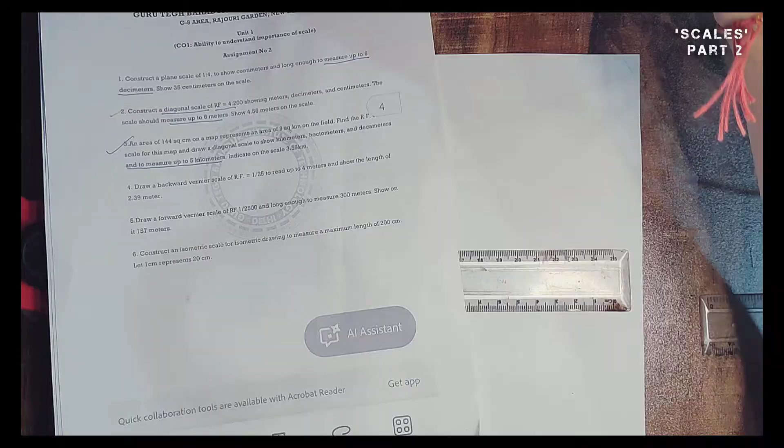Now in this video I'm going to explain question numbers 4, 5 and 6, which are remaining. So question number 4 says you have to draw a vernier scale. Okay, RF 1/25, read up to 4 meters, show the length of 2.39.

So basically there are two types of vernier scales. One is backward vernier scale and one is forward vernier scale. In this scale everything is similar to the previous scales. Only the difference will be shown. I will tell you the difference in this scale later on.

First, RF is given to you, 1/25. Maximum length is given to you as 4 meter in question number 4, and similarly LOS will be equal to 1/25 into 4 meter, converted to centimeter. You have to cancel 25 and 4, which means 16 cm, 16 centimeter.

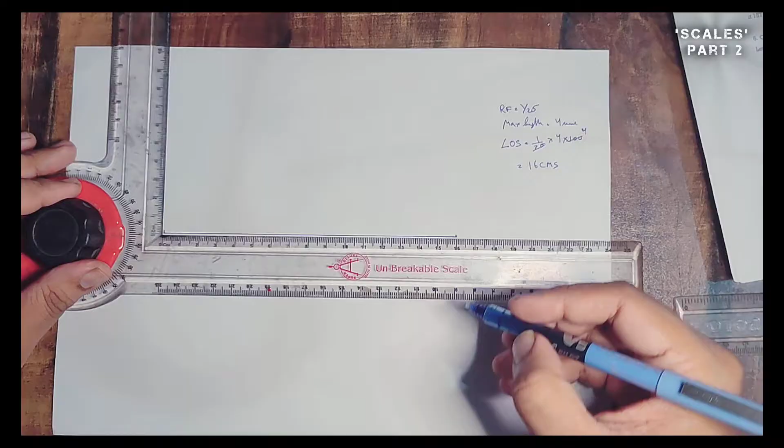So first of all you have to draw a line of 16 centimeter directly as for a normal plane scale. This line is of 16 centimeter. Okay, now you can divide this line into 4 equal parts by using the same method.

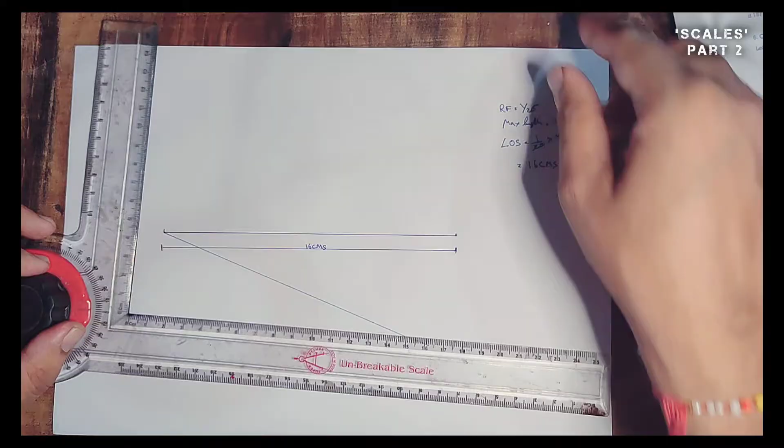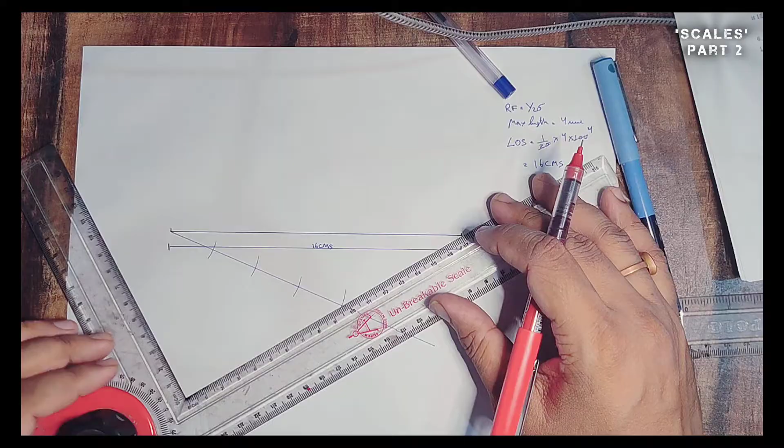Take any length of the arc and make 4 arcs on this line like this: 1, 2, 3 and 4. This would be your 4th arc. Now, as earlier, you have to join the last 2 points of this arc. 1, 2, 3, 4. This is 4 meter; 16 centimeter is representing 4 meter. So we have joined this.

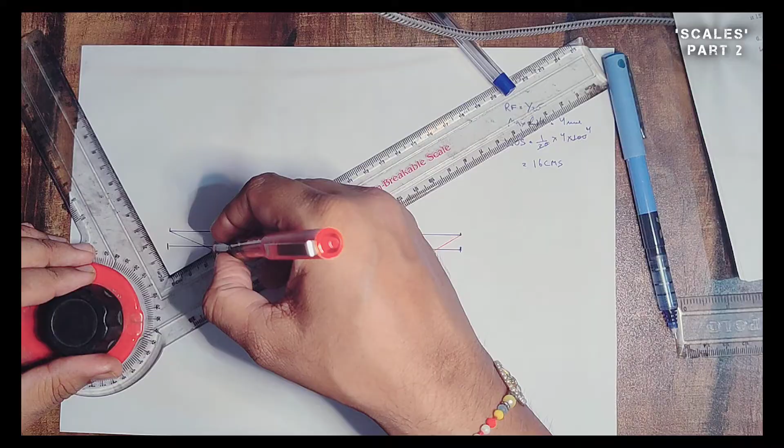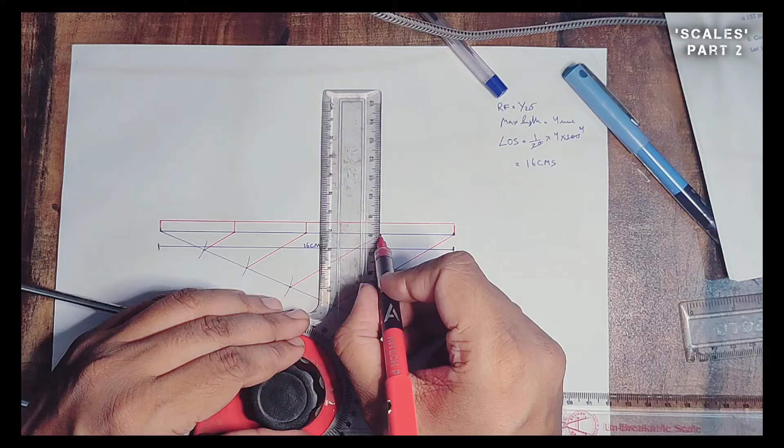Now you have to tighten your drafter, and then make the next line, then the next line, and then the next line, and then close this box as earlier, a 5 mm box. So this is the first division, second division, third division, and so on.

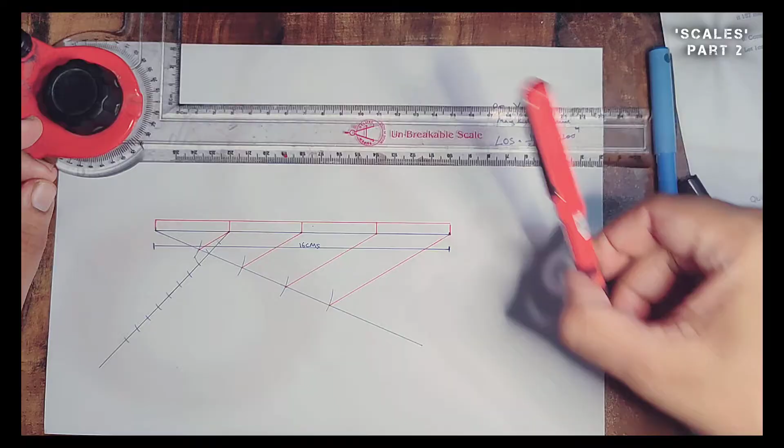Now for this first part you have to divide this into 10 parts as earlier in the plane scale. Same situation is there. Make a line, divide this line into small 10 parts. 1, 2, 3, 4, 5, 6, 7, 8, 9 and 10. These were the 10 parts as of your normal plane scale. Until this step you have to follow the same process of the plane scale.

You need to make your drafter parallel to this line, and then you have to make parallel lines through this point, like this. Like this. This. Again a parallel line.

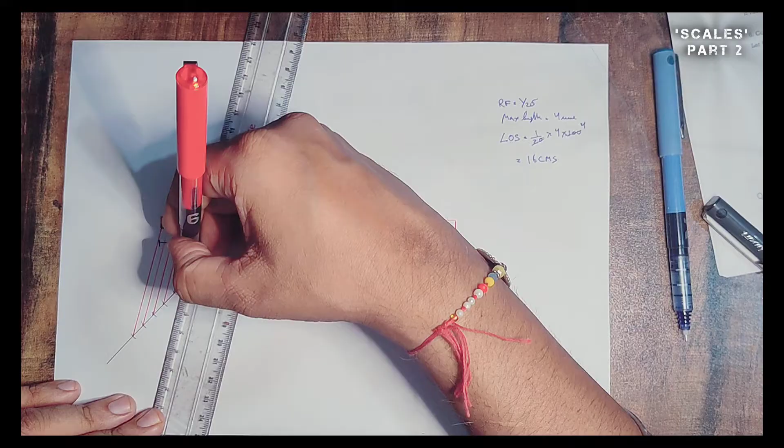This completes your division of the first box as of a normal plain scale. First, second, third, fourth, fifth, sixth, 7, 8, 9 and 10. So this is your division of the first part.

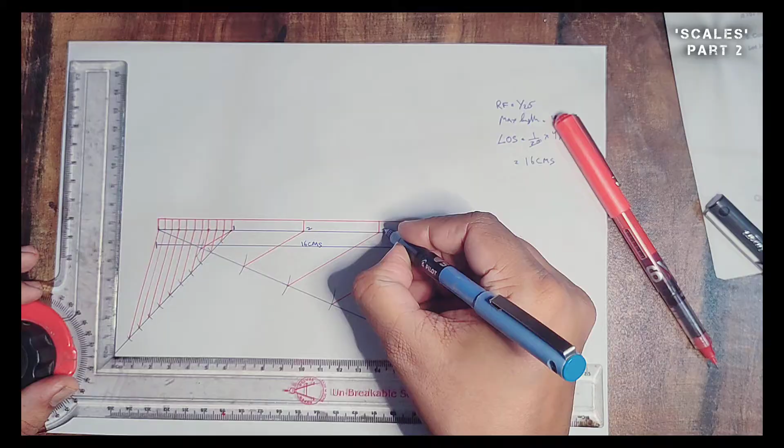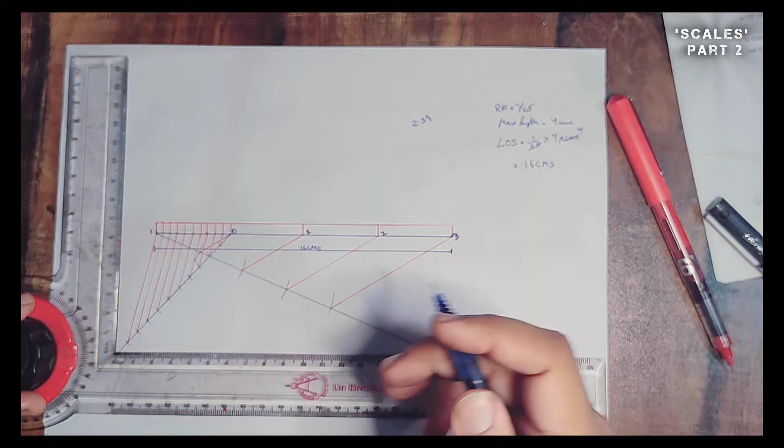You can write it over here like 1, 2, 3, 4. Sorry, this is 0, 1, 2, 3. You have to write something like this, and 1 again. Now as of diagonal scale we can draw this, and you can measure this distance 2.39. As you know, this is a 4 meter line. Every division is a 1 meter length. This is representing a meter.

So this is a 4 meter line. This is representing 1 meter. This is 0.1 meter. We need to find out 2.39, so it is not possible. So we have to make something else. You just need to find out the width of one division of this bracket. One division is coming out to be 4 mm. So you need to make another division over here, 4 mm. You need to make an 11th part of this line, like this. 10 plus 1, 11th part.

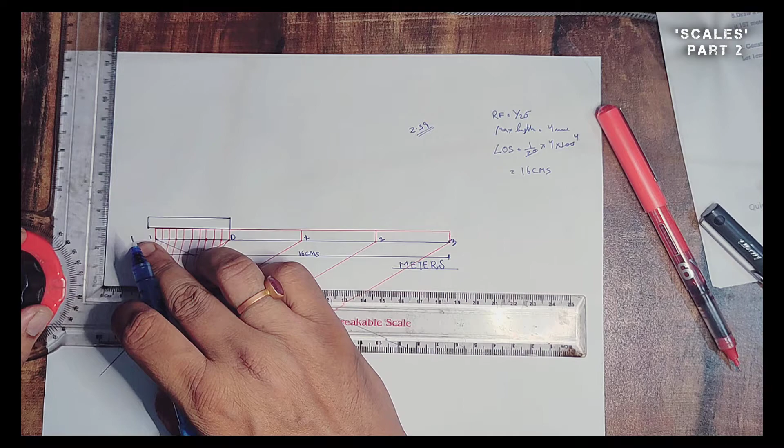Okay. Then you have to close this in a box again as earlier. We have taken 11 parts on the upper box. So now we have to divide this 11 part box into 10 parts again. We need to make a line over here, and then we need to divide this box into 10 pieces.

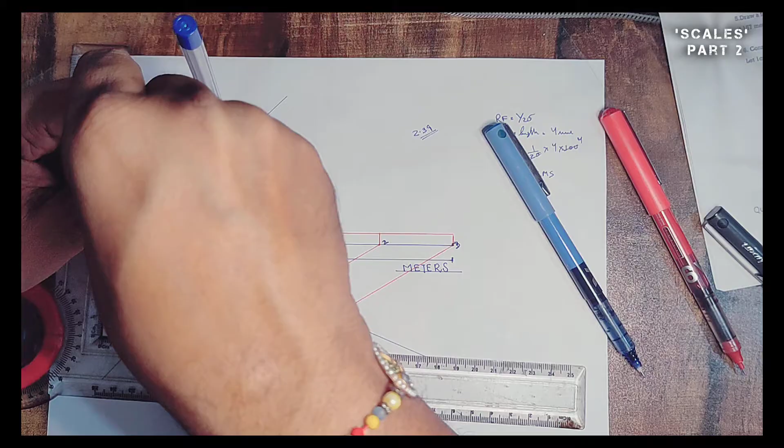1, 3, 4, 5, 6, 7, 8, 9, 10. 1 2 3 4 5 6 7 8 9 10. So now you should join the last point with the first division. This first point has to be joined directly.

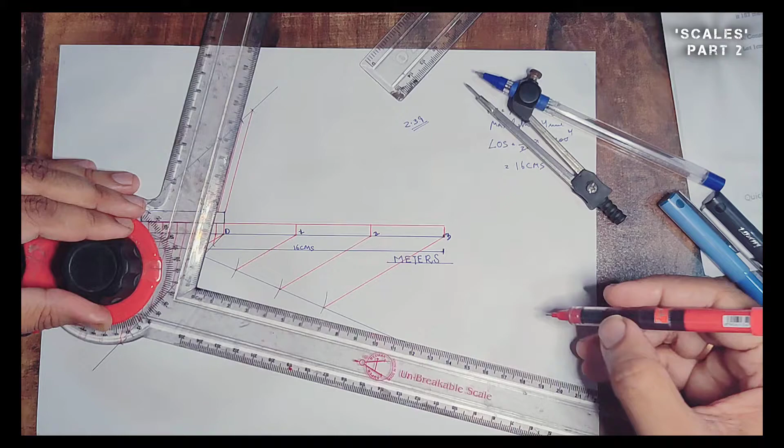Now we have to take the drafter and align our scale to this, and then move it toward this point and make a line parallel to the previous one. Then move this and make a line parallel to the previous one like this. Then make lines parallel to the previous one like this, and like this.

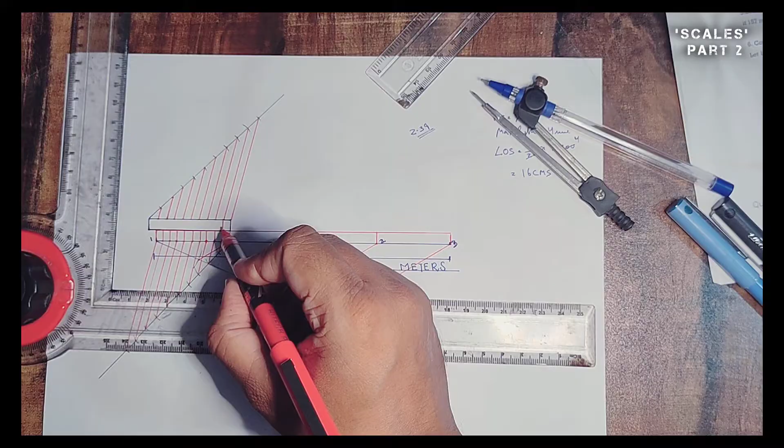So you can see the divisions which are in the above panel are a little bit above this division, because if this is 1 meter, this is 0.1 meter, so this would be 0.11 meter. So these divisions are a certain small quantity higher than the previous division.

So if you make the exact system, then this is also 10, this is also 10, but we have taken one more part of this. So this one division is equivalent to 0.11 meter, and this is 0.22, 0.33, up to 0.99 meter, then it will become 1.1 meter. This total length is 1.1 meter. So this is 1.1 meter, this is 1 meter.

So now we have to show 2.39. So first we have to eliminate this 9. So we have to subtract something from the table of 11, so that this last digit is eliminated from our dimension. Like if we want to show 3.34, then you have to eliminate 4. If we want to show 2.39, then eliminate 9.

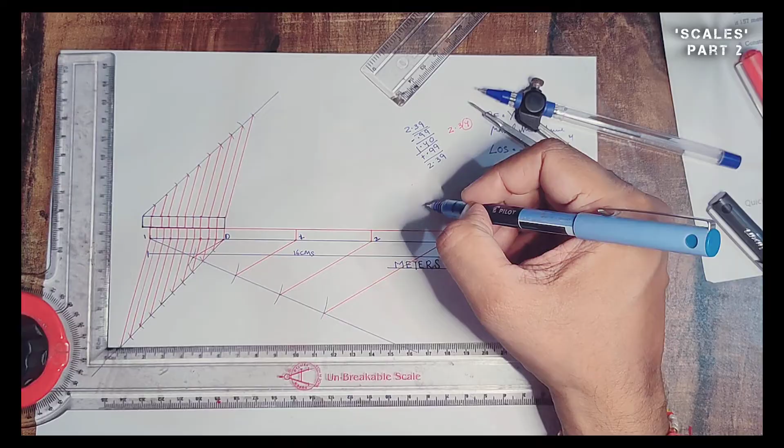So subtract 0.99, so you will get 1.40. We can also write 1.40 plus 0.99, you will get 2.39. So here is subtraction, here is just addition. So we have two quantities, 1.40 and 0.99.

This is 0.99. If this is 0.9, this would come here on this position. So this is 0.9 and this would be 0.99. It is coming out to be very far, but this is a manual mistake, so you have to be very careful while making this. So this is 0.99, now you can mark it here. This is 0.99.

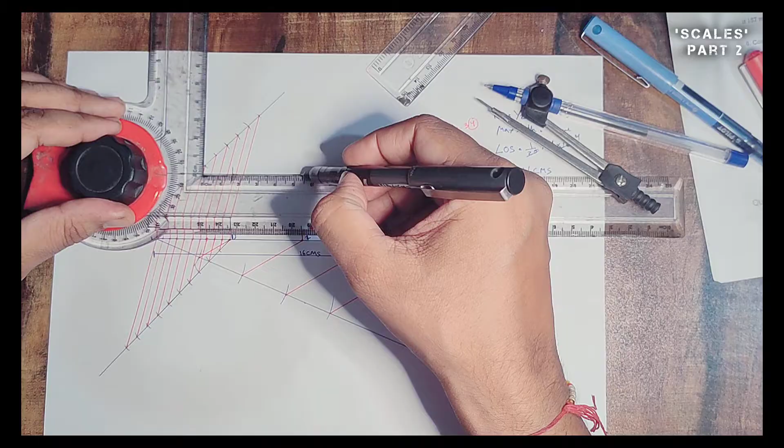Up to this distance it covers 0.99, and then you have 1.4. This is 1. Up to this distance, it is 1. So this is 1 plus 0.99. I need 0.4 more. For that reason we have to divide this into 10 more divisions.

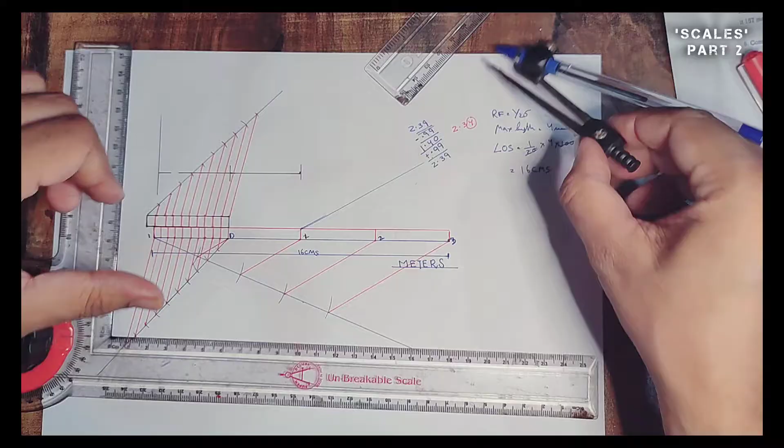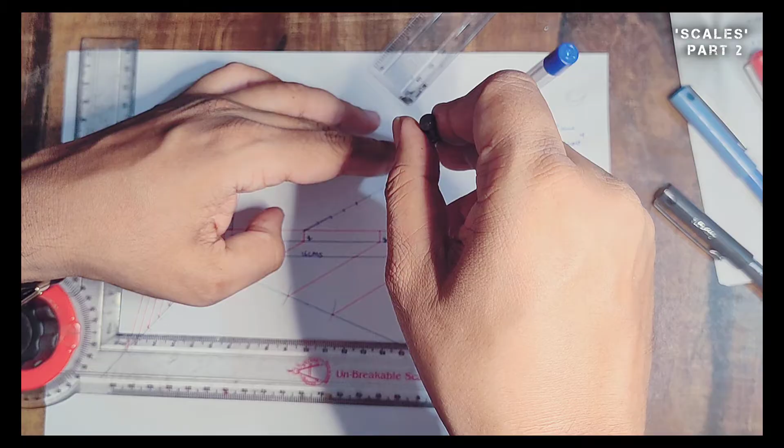So again I have to take a line and make 10 divisions of this line. So this is 1, 2, 3, 4, 5, 6, 7, 8, 9 and 10. We are dividing this small box into 10 divisions like we have done in this case. So in a vernier scale you have to divide these boxes into 10 divisions if it is necessary.

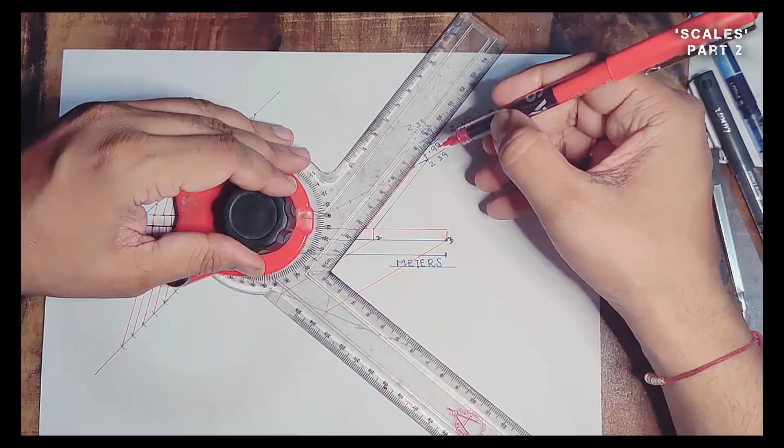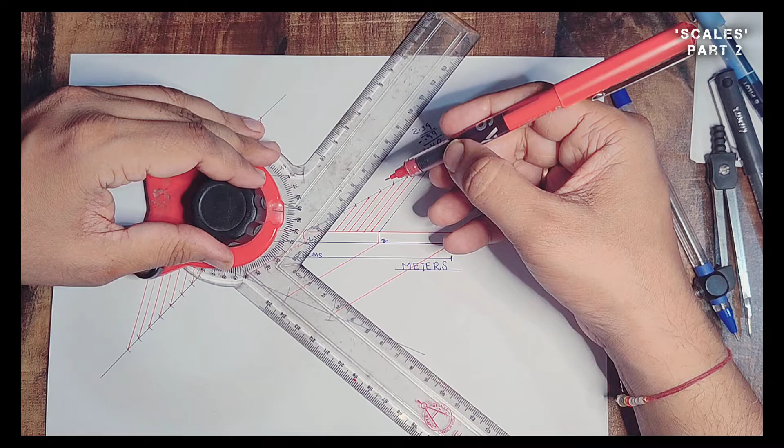Now you should join the last point with this point as earlier. Then you take your drafter and make it parallel to this. Now draw a line. I am making it as perfect as possible, but still it will generate an error because my table is not that good and I am using a pen which we cannot erase. So I have made these 10 divisions again.

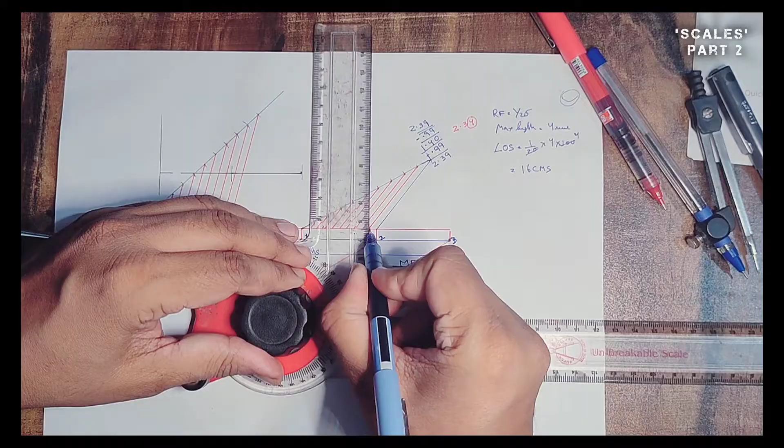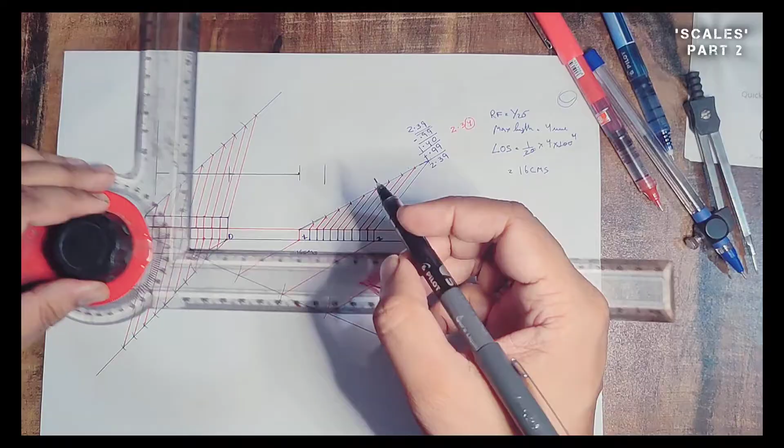So this is 1, 2, 3, 4. This is your 10 divisions. Now we have to take only 4 divisions because we need to complete 1.4. So 1, 2, 3, 4, this is your 0.4. So this completes the distance of 1.4. So you can write it over here. This total is 1.4,

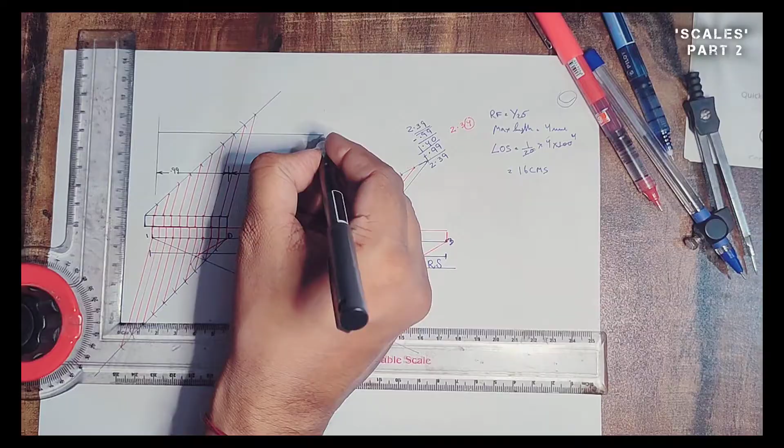and this distance is 0.99. So the complete distance would become 2.39. So you can extend this line and mark it again over here. This complete distance is 2.39. And this type of scale is called a backward scale.

Backward scale, it is a backward scale. And this is question number 4. So I hope you had no problem in calculating the measurements. Like you want to calculate 2.34, then you subtract 0.44, so this would become 1.90. 1.90 plus 0.44, this would become 2.34, so this would be addition.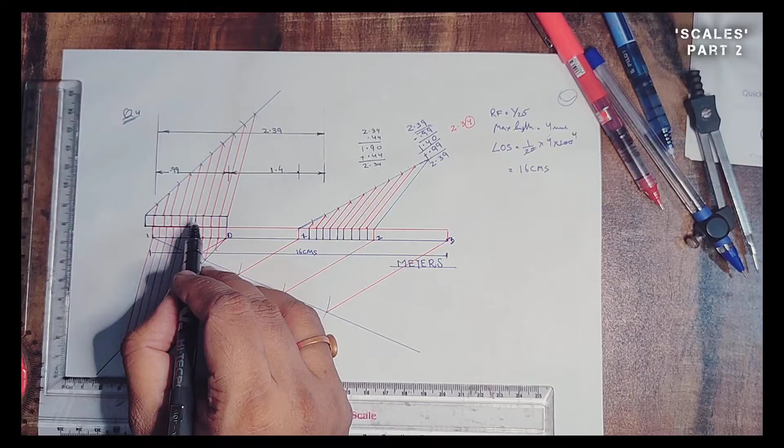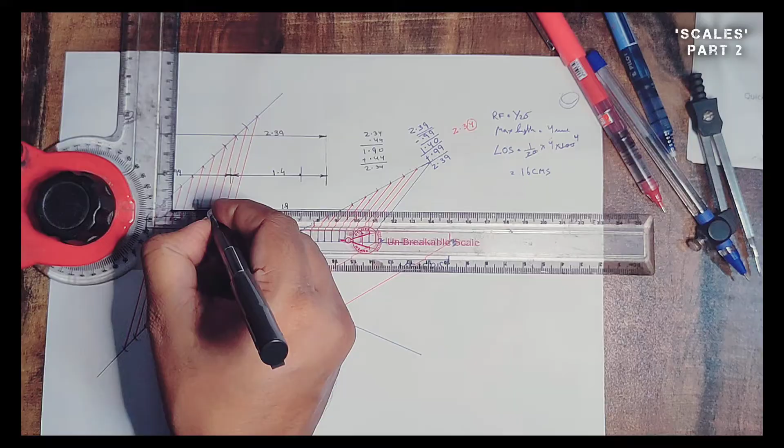So we need 0.44 from this and 1.9 from this, like 1, 2, 3 and 4, and 1.9 from this, like this is 1.9. This complete distance is 1.9 and this is 0.44. So the whole distance is basically 2.34 from this place to this place.

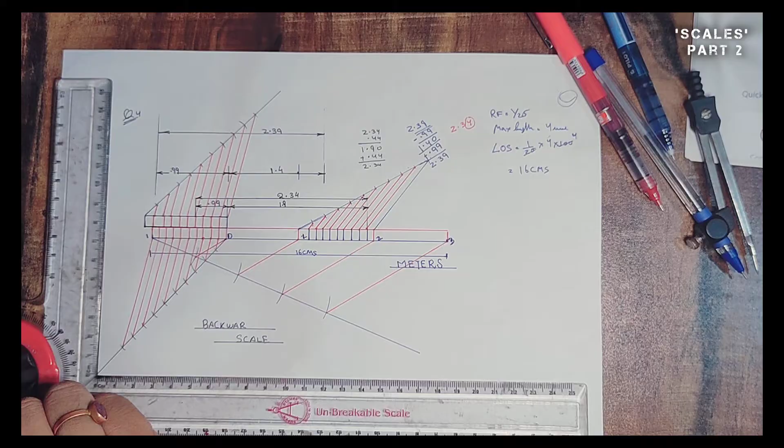So you can measure any measurement up to second decimal from this scale, like the diagonal scale. We can use the diagonal scale similarly, but this is also a special scale which you can use. So this is called a backward vernier scale. Okay, I think you have understood everything about the vernier scale.

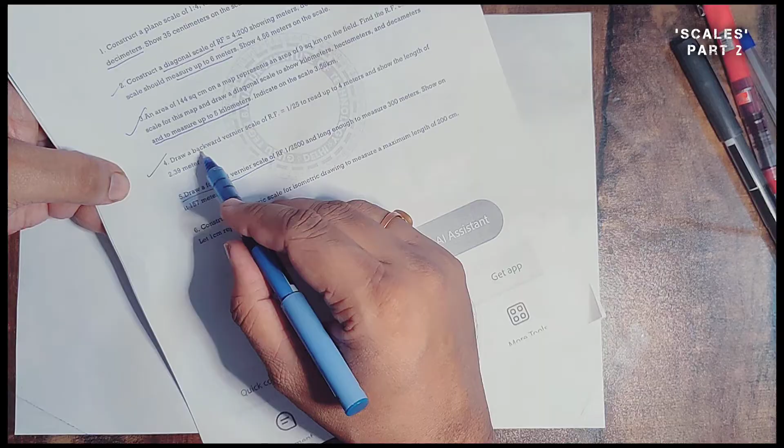Now in this video I am going to explain the second last question, which is based on the forward vernier scale. As in the previous question, RF is given to you and maximum length is given to you. Everything would be same. You have to calculate the LOS. In case of backward vernier scale, we used to take 11 parts of the base scale, and in this scale you have to take 9 parts. So you will see the magic, the way we will calculate.

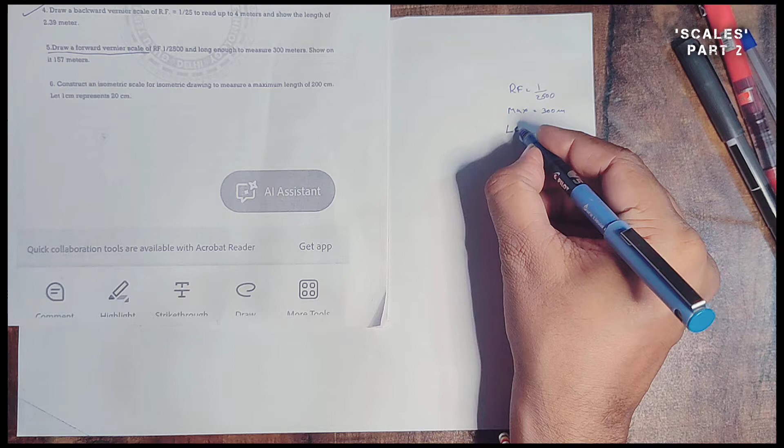First, the RF is given to you. RF is 1 by 2500. Next would be maximum length. Maximum length is given to you as 300 meters, and you need to mark a distance of 157 meters. So LOS would be 1 by 2500 into 300 meters, means 1 by 2500 into 300 into 100 centimeters. So this would become 12 centimeters is LOS.

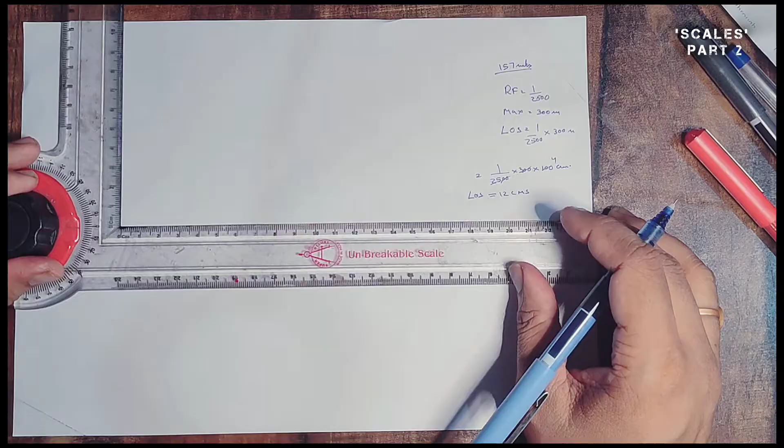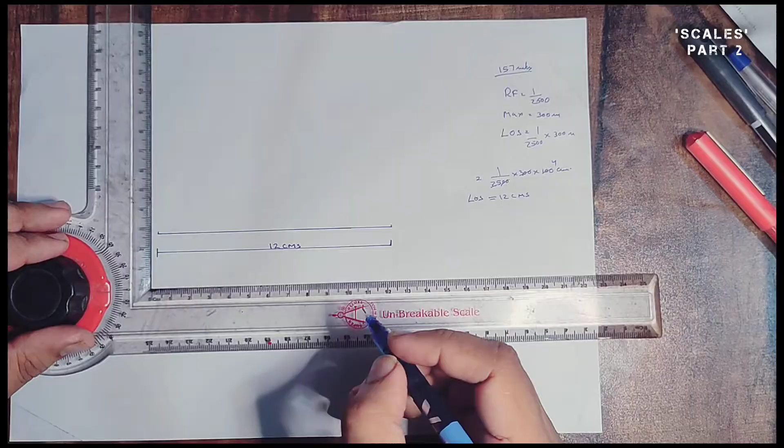So you need to make a line of 12 centimeters like this. This is a 12 centimeter line which is representing 300 meters. So we need to make 3 divisions of this line, only 3 divisions, because of 300 we need to make 100 meter divisions.

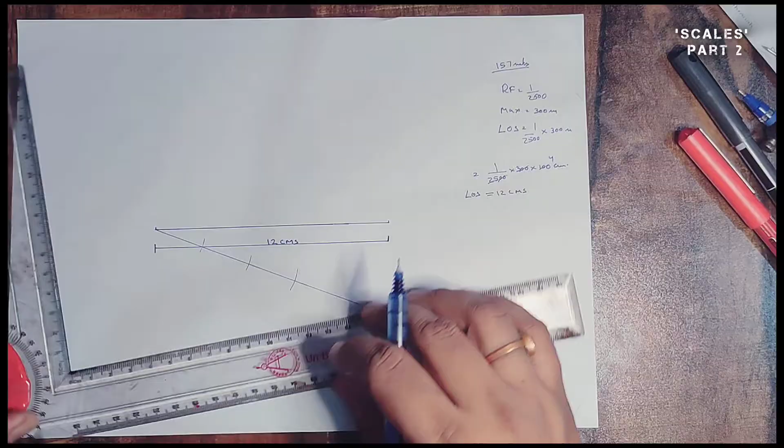So 1, 2 and 3. Now you should join the last division with the corner point of this line like this, and then you fix your scale, make a parallel line like this. Then you will get 3 equal divisions in the box. Three equal divisions.

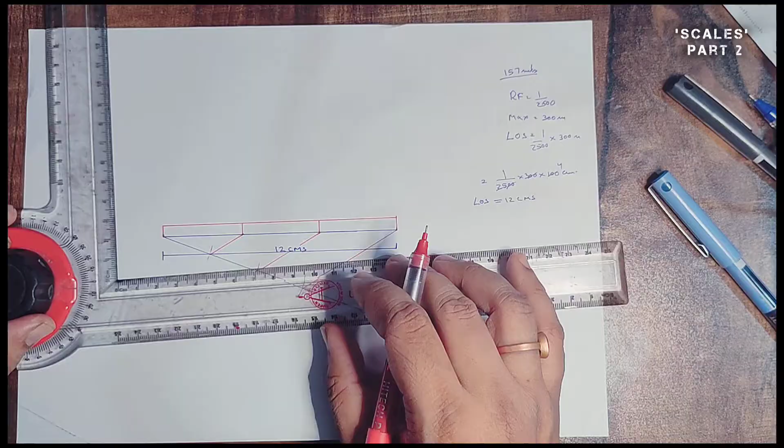Now you have to make again 10 divisions of the first box. So take any angle from this point and mark 10 divisions on this line. Small divisions should be there. 1, 2, 3. This is 10 divisions. 1, 2, 3, 4, 5, 6, 7, 8, 9 and 10.

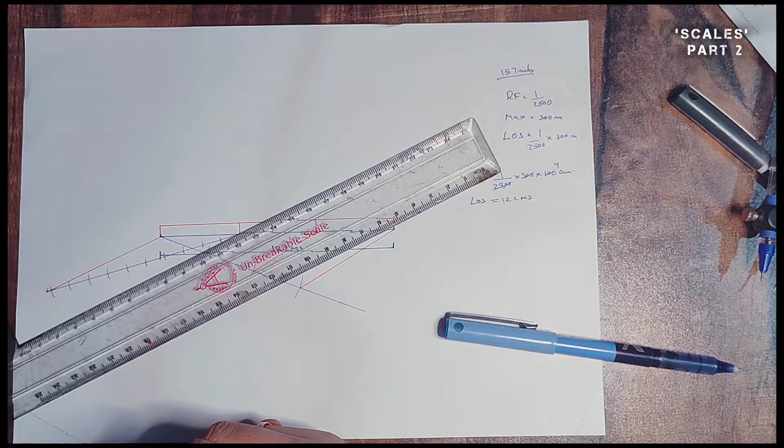Now you join the last arc with the corner, with the bottom corner, as you can see. Then you have to make parallel lines, fix your scale and make a parallel line over here. Again a parallel line.

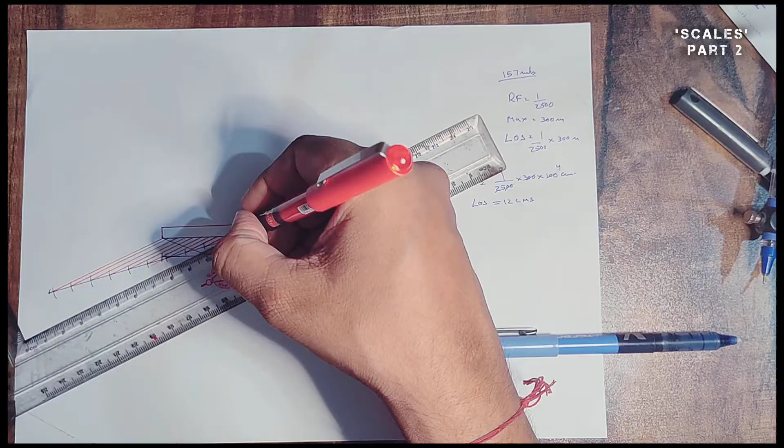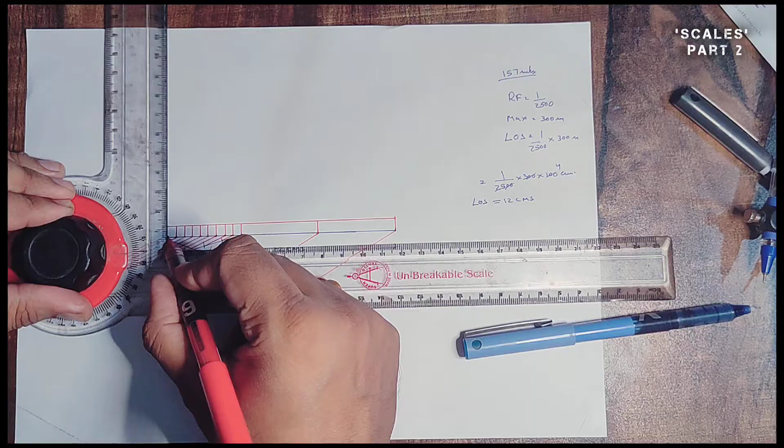Okay, so these parallel lines you have to mark them, making it 10 perfect divisions. So almost it is perfect, but still there is some misalignment.

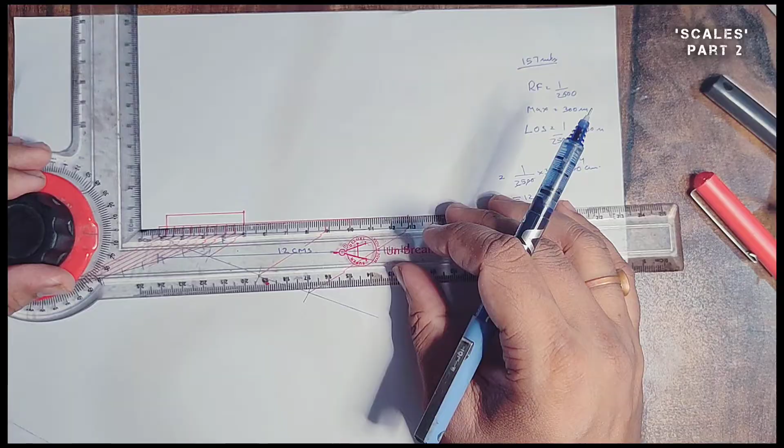Now you should take 9 boxes and make a 5 mm box again. 9 boxes, like in the previous question we had taken 11 boxes, 11 divisions. Now we have to take 9 divisions, and then we will make a box over here. You need to divide this box in 10 divisions again. So you can divide from here or from here, no problem. Any side you can take.

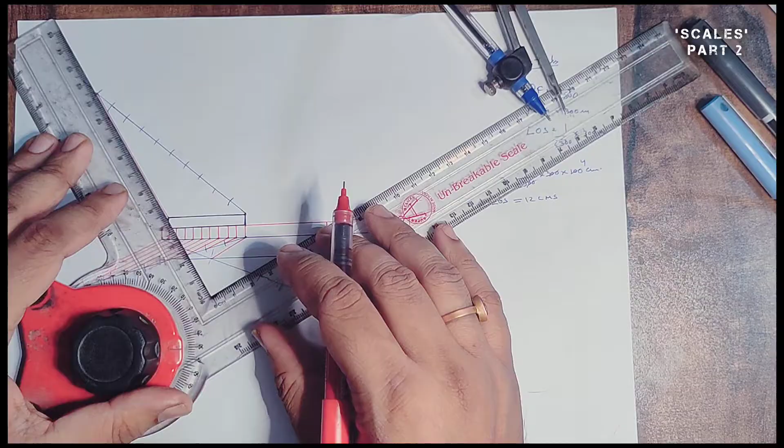Now you have to join the last point with the last arc. This is the 10th arc. Even a slight mistake can bring a very big error. So that's why you have to be very careful when you are drawing such things.

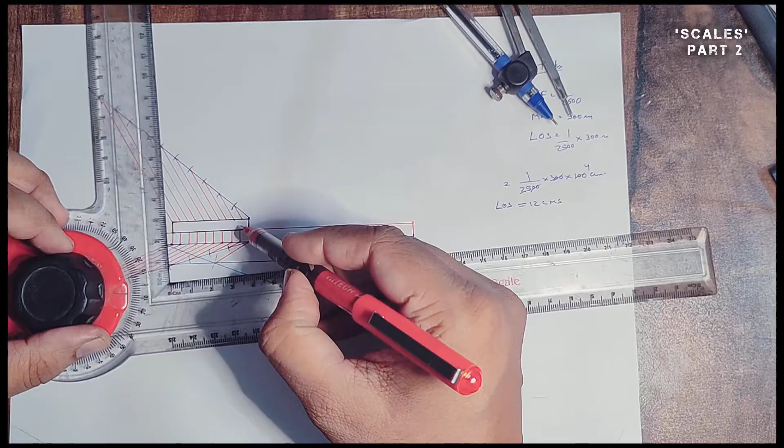So whatever division we will get, it should always be behind this. So if you are perfect, then all the divisions should lie just behind the division below it, because it is 9. So there is an error, that's why my divisions are not matching.

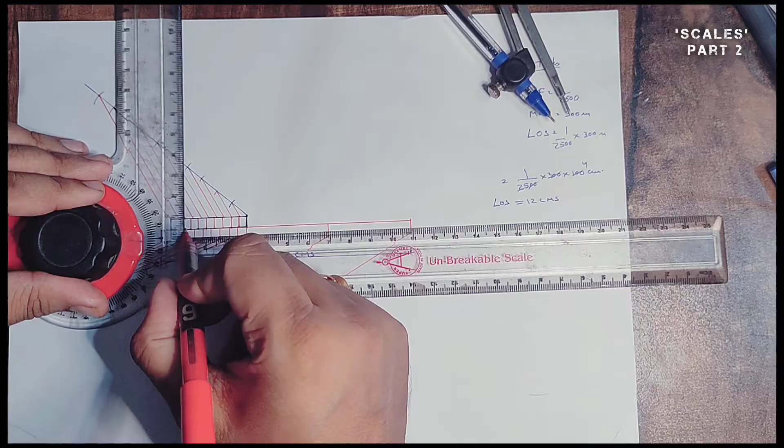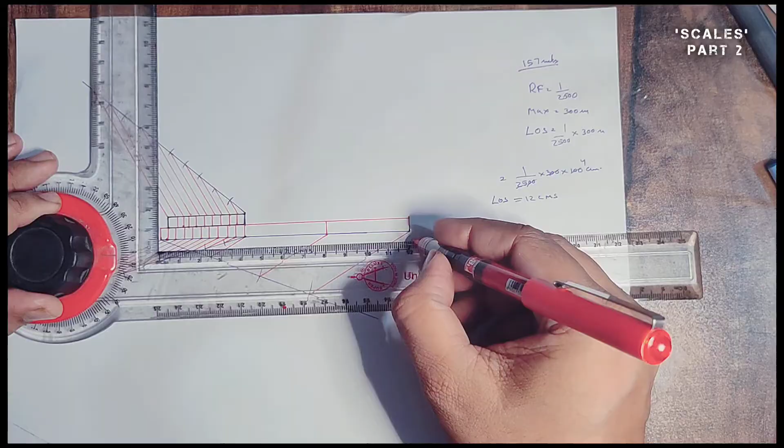So you have to make it accordingly. Some divisions are not matching because I am using pen, so you have to make it accordingly. So this is a 300 meter segment. You can write it over here. This is meters, and this is 0, this is 1 and 2, and this is again, sorry, 1. This is 1. So now we have to find out 157.

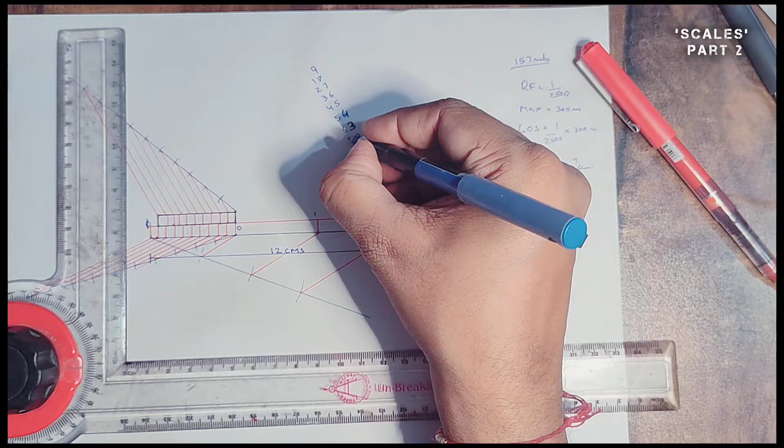In the table of 9, if you write 9, 18, 27, 36, you should increase the number on one side and decrease from the other side. You will get the 9 table. So this is the beauty of a 9 table. Every digit comes into the picture, like 45, 54, 63, 72, 81.

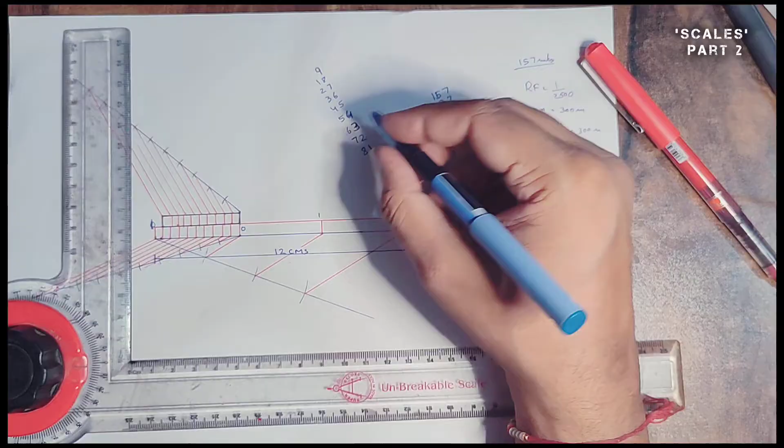So all the digits 9, 8, 7, 6 come into this place, and we have to eliminate the last digit of any dimension. Like this is 100 meter, then this would be your 10 meter distance. This is 100, 100, 100, 300. So this would become 9 meter. This is 10 meter, this is 9 meter. So we need to subtract 27. In order to eliminate 7, 27 has to be used. You have to use the 9 table, and in the earlier question you had to use the 11 table.

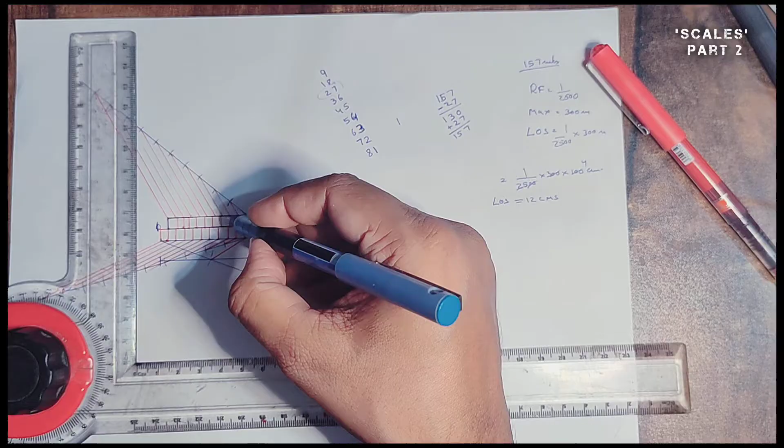So in order to find out the dimension on the scale, you need to eliminate this last digit. So eliminate by 27 and the remaining would be 130. 130 plus 27 is 157. So we need to find out 27: this is 9, 18, 27. So this is 27, the distance would be 27. The distance from here to here is 27. We need to make 130.

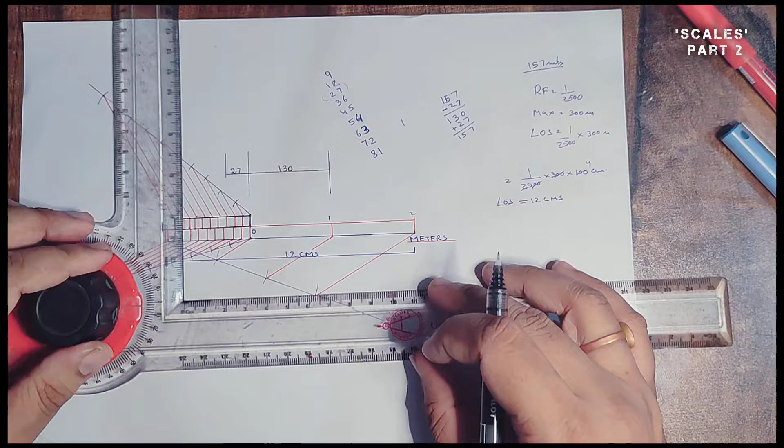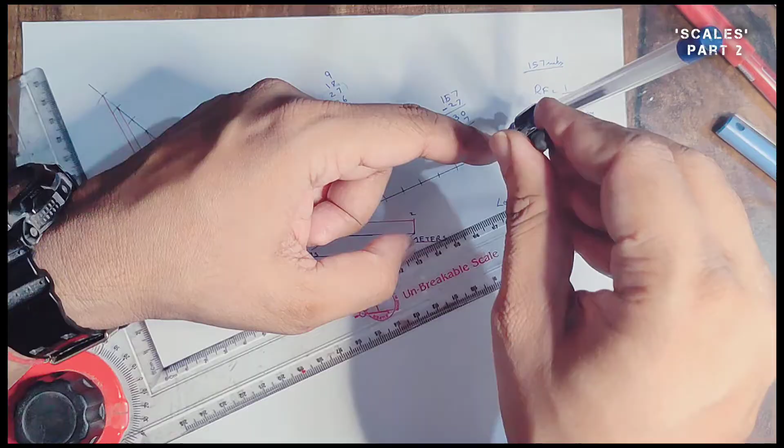See, this is 100, this is 100, so we need 30 more distance, 30 more divisions. So we need to make divisions again on this part for calculating one dimension only. So just draw a line at any angle, then make 10 divisions again over here. So this is 1, 2, 3, 4, 5, 6, 7, 8, 9 and 10. Now you need to close this as in the previous method.

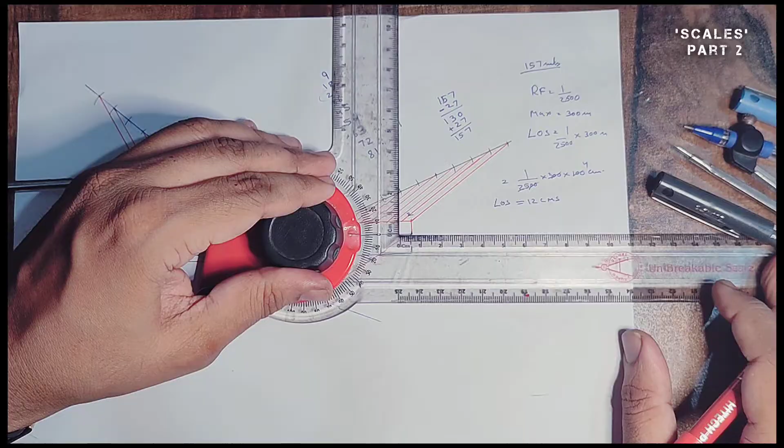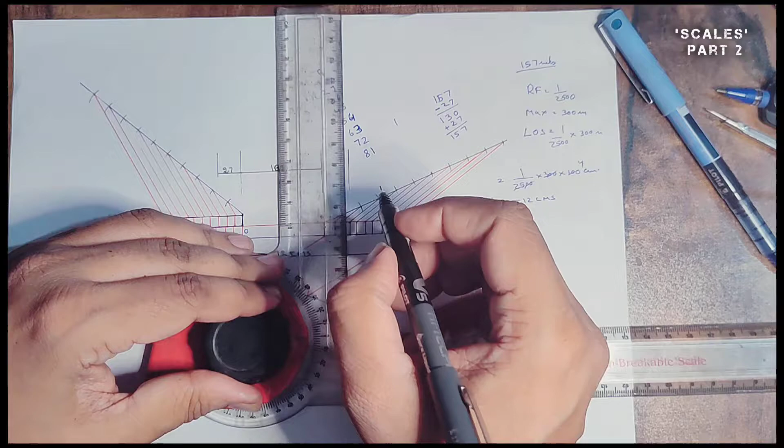Now you tighten your scale and then draw parallel lines. You need to make vertical lines. Okay, now we need 130. This is 100 meter, this is 100 meter. Now we need 130. So this is 30 meter. So the total distance from here to here would be 157 meter. This 157 meter is calculated.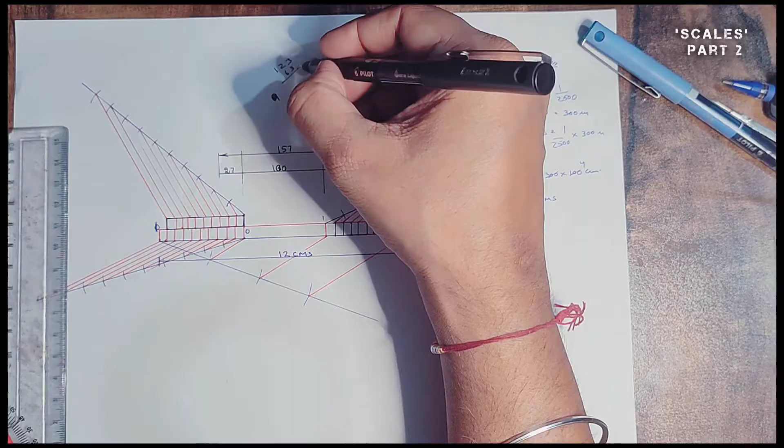You can take any distance, like 94, but you need to take more than 100, because in order to make 94 we have to divide this part also. You can say anything, like 123 meters. So for 123 you need to eliminate 3, so you will subtract 63, and you will get 60. 60 plus 63 is 123.

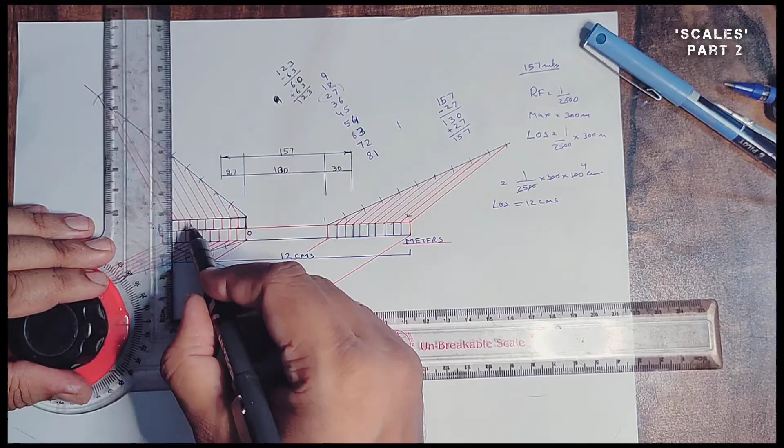You have to make divisions of this part, and you take 6 parts from this position. 63 is coming out to be 7. So you need to take 7 divisions from here and 6 divisions from here. 9 sevens are 63. So you take this point like this. Up to this point it is 63, and you need to take another 6 divisions, which I will not draw at this time. This total would be 60, and this total would be 63, and together 123.

So this is how we calculate all the distances possible on this vernier scale. This is called the forward vernier scale, and you have to draw only one dimension on the paper. You will not get to draw 2 dimensions, because you have to make all the divisions, and that would make it more complex. This is the forward scale.

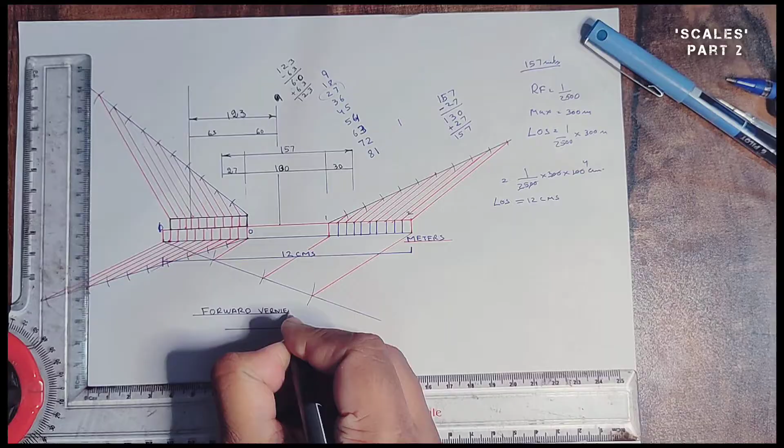Forward vernier scale. Okay, this completes your vernier scale. Now the next video would be for isometric scale. This would be the last question of the scale assignment. That would be the isometric scale.

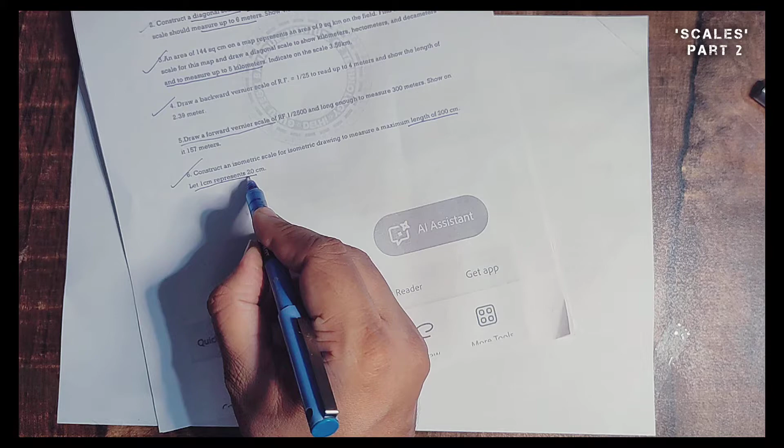For isometric scale, you don't need to follow this RF and maximum length. So you need to make only an isometric scale. You don't need to make a plane scale on isometric scale. This is basically a plane scale over isometric scale. You need to draw just a 10 centimeter isometric scale. So how to draw that 10 centimeter isometric scale?

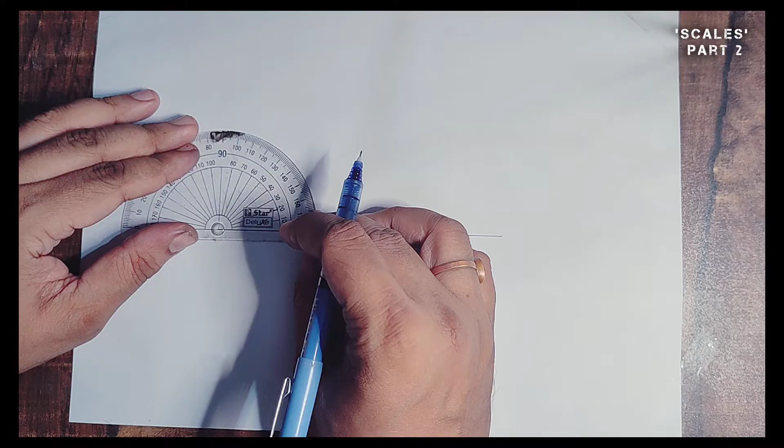You just need to make a straight line, any length. Then you have to make 2 angles, one is 30 degree and one is 45 degree. Take your scale. This is 30 degree and 45 degree. 2 angles are required to be made.

And on 45 degree line, you take any distance, and you should draw a 10 centimeter scale. Start from any distance: 1 2 3 4 5 6 7 8 9 and 10. You need to mark 10 centimeter length with a separation of 1 centimeter by using actual scale.

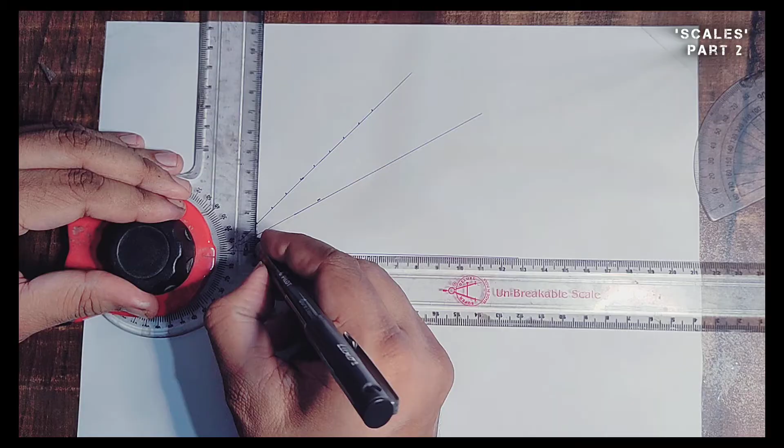Okay, then you should draw vertical lines like this. These are vertical to the baseline. You should always remember all the lines are vertical to the baseline. You have to rub this line, and you just need to make up to this 30-degree line. I am just showing you how to bring these lines downward, but you have to draw until this 30-degree line. You don't need to draw up to bottom.

Then you have to take your scale and you need to make a box which is parallel to the 30-degree line, approximately a 5 mm box. You need to make it parallel to the 30-degree line, and it has to be up till the point 10. It is slightly bended.

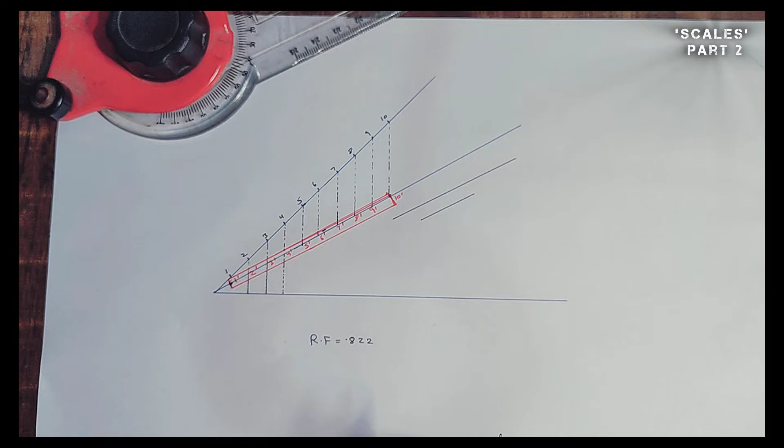This generated scale is called as isometric scale. You need to write it over here. Obviously if this is 10 cm, then this would become a reduced value. The reduction factor here is 0.822, fixed in isometric scale, and the generated scale is called as isometric scale.

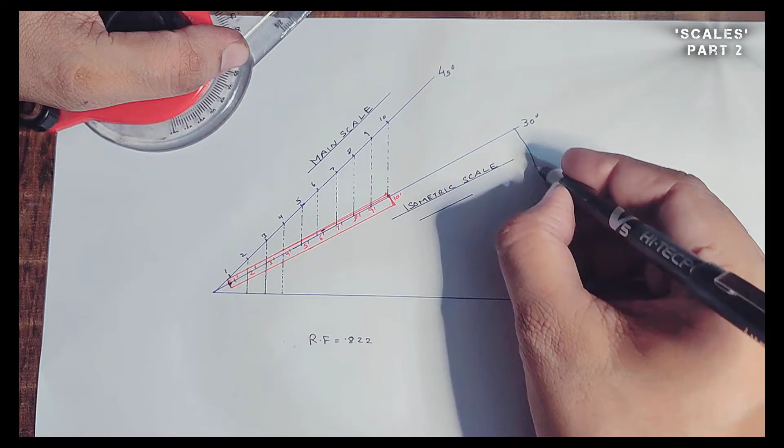You need to show this 30-degree line and this 45-degree line, and you can also mention there, this is called as main scale. So we have generated isometric scale by using main scale or actual scale. This is the main scale and isometric scale. This is the whole story of this isometric scale, 45-degree and 30-degree. This is the complete isometric scale.

Nothing else you have to draw. Whatever dimension we will take it from this. So the reduction factor from this to this is 0.822, 82%. If this is 10 mm, this would become 8.22 mm. This is the reduction factor. So that finally completes your question number 6.

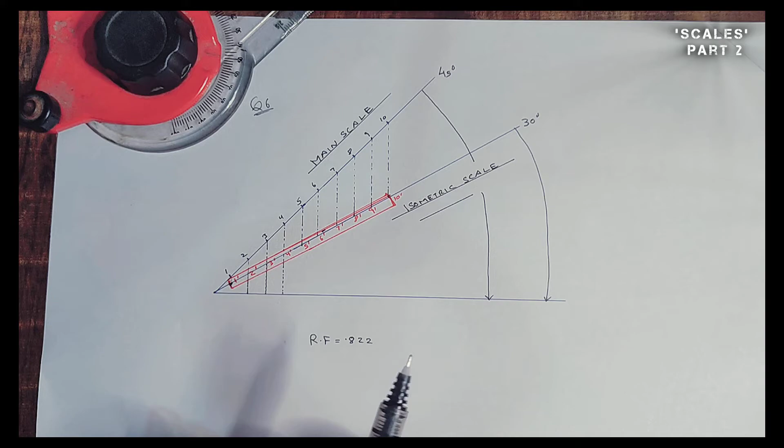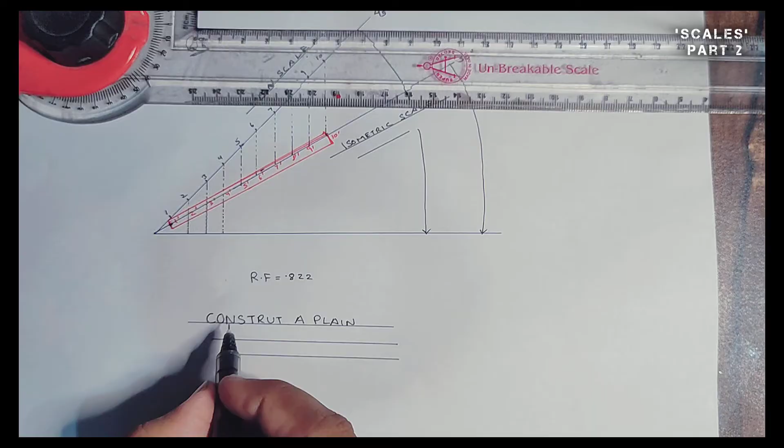So you have to draw all these scales on the sheet, and if possible you need to write the questions also. In order to write the questions, you need to make lines in the separation of 5 to 7 mm, and then write in a proper separation: construct a plain scale. You need to have 7 mm distance, but the height of this whole writing should not exceed 5 mm.

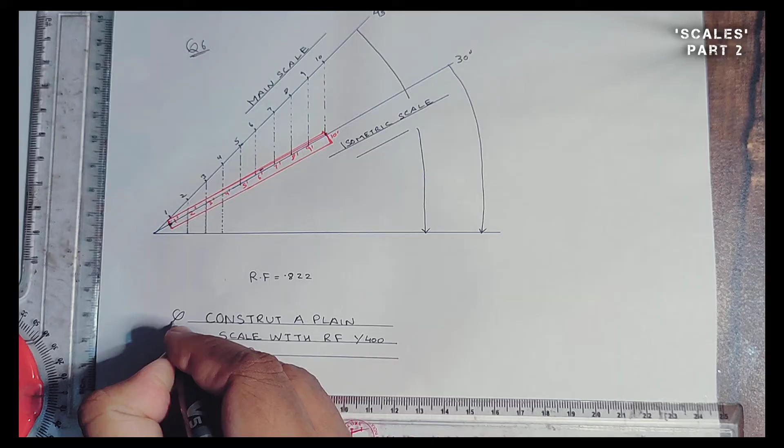Plain scale. There must be a gap in this column. With RF 1/400, and likewise you have to write the whole question for these problems. For all the problems you have to write the question also: question number 1, question number 2, question number 3. Okay, that would be the proper way of doing all the scale assignment.